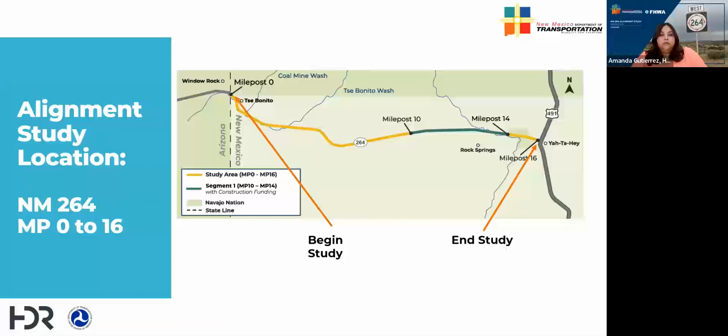The corridor itself has 3 distinctly different segments. Each segment has its unique characteristics, and so they were evaluated separately. On the far west end at milepost 0 to milepost 0.6 through Bonito, an urban alternative was evaluated. Traveling east through the rural section to Yah-Ta-Hey, more rural alternatives with limited access were identified. Finally, on the east side at milepost 15.5 to milepost 16 through Yah-Ta-Hey, it was a combination of urban and rural conditions, and so those conditions were evaluated separately.

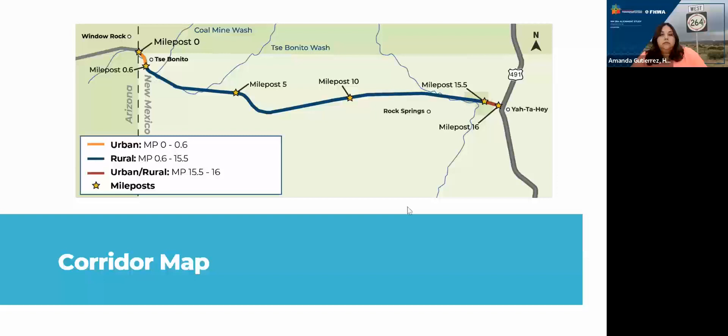As part of the New Mexico 264 alignment study to date, we've documented the existing conditions. That's where we go in and look at specific elements in the corridor that may need improvement or to be addressed. Additionally, we looked at traffic and safety areas of concern. Transportation needs analysis was performed to identify speed characteristics and other elements that we'll cover later in this presentation. It also investigated sensitive cultural and biological resources, and it identified improvement alternatives broken up into those 3 distinct segments I discussed earlier. Amanda mentioned the meeting where we sought public input and agency feedback, and from that point we developed alternatives, evaluated them, and proposed those recommended improvement alternatives.

The purpose and need of the project is really the backbone. It's what needs to be addressed throughout the corridor specific to this project. One of the main elements was to address the existing conditions of the roadway. That includes pavement condition, geometry, and other elements that could impact the safety of the corridor. Additionally, we looked to improve drainage conditions.

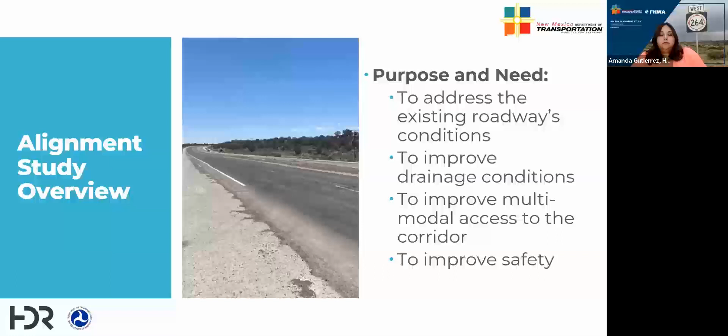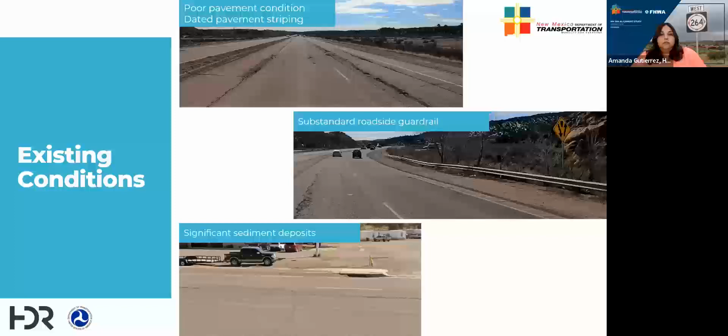As far as existing conditions go, the top picture shows a location with poor pavement and really outdated striping. This is not a unique photo in the corridor—the pavement condition is pretty poor throughout the full 16-mile corridor. In the middle, we see some substandard roadside guardrail. Since this guardrail was installed, the standards have been evaluated, tested, and improved, so there are better systems now for handling roadside obstacles.

And then on the bottom, we picked a segment through Bonito to note the significant sediment deposits. You can see that the sediment buildup makes the sidewalk almost unusable.

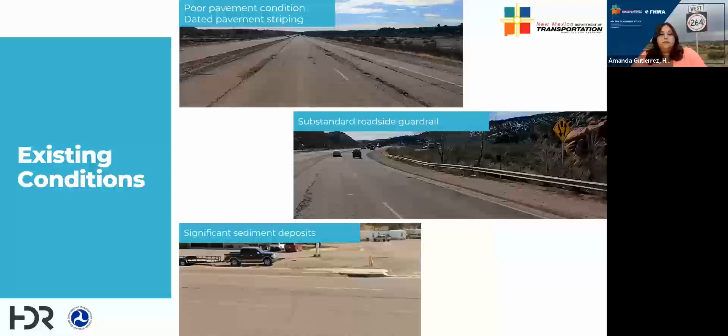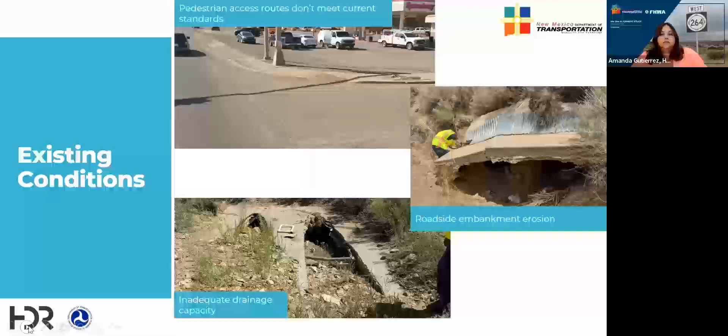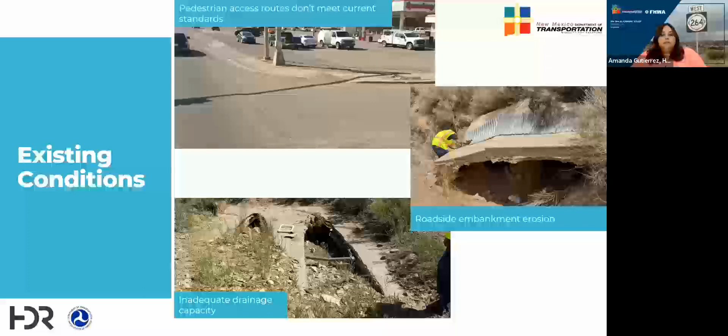Pedestrian access routes don't currently meet ADA standards. In the top picture, you can see the curb ramp at Alma Drive on New Mexico 264. Not only does it have significant sediment at it, but it doesn't meet current standards as far as ramp slopes and grades. And the middle picture really shows the issue of erosion throughout the corridor.

This is not unique to this location—there are several pipe outlets experiencing similar erosion. And the bottom picture shows sediment deposits within a pipe, really limiting its capacity, and in some locations causing water to overtop the road.

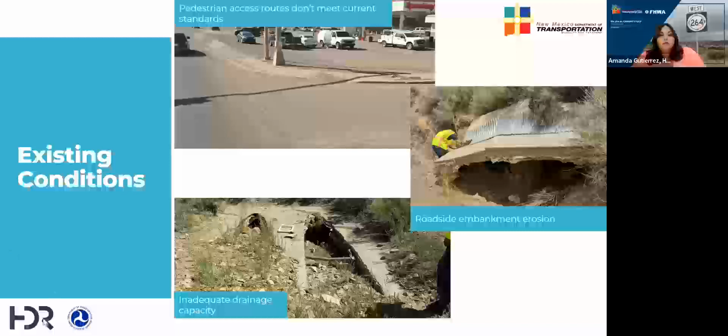For the urban section through Tse Bonito, from milepost 0 to 0.6, the existing typical section consists of a 12-foot two-way left turn lane, two 12-foot driving lanes in each direction, and two 2-foot outside shoulders with 5-foot existing sidewalks on both sides of the road.

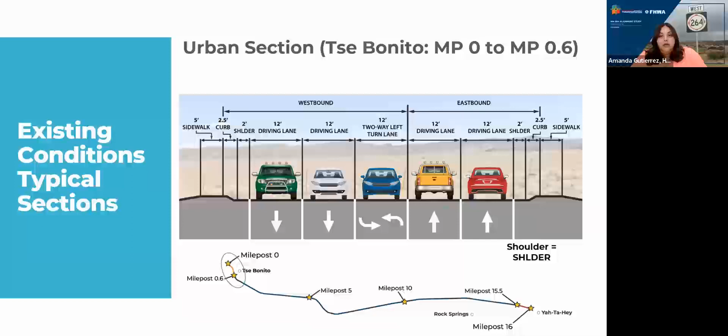For the rural section, this is milepost 0.6 to milepost 15.5. The existing typical section is a 16-foot raised median, two 12-foot driving lanes in each direction, 10-foot outside shoulders, and 4-foot inside shoulders.

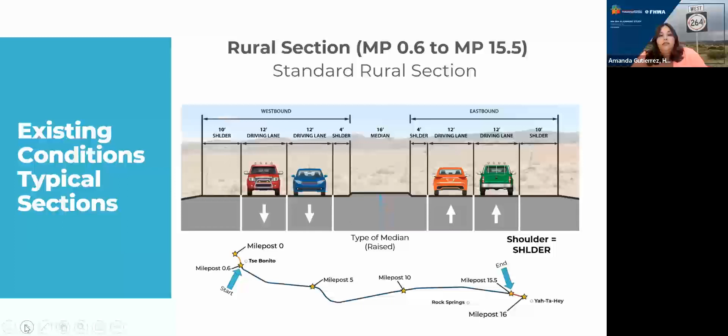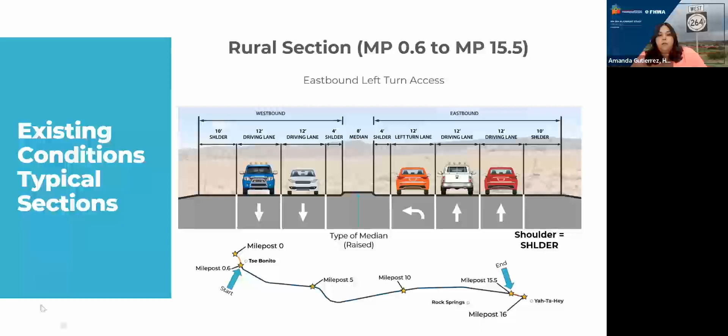In the rural section, for the existing left turn lane areas, there is an 8-foot raised median and a 12-foot dedicated left turn lane. The remainder of the typical stays the same from the previous slide. This slide shows, for eastbound traffic, the 12-foot dedicated left turn lane, and this one shows the westbound 12-foot dedicated left turn lane with the 8-foot median.

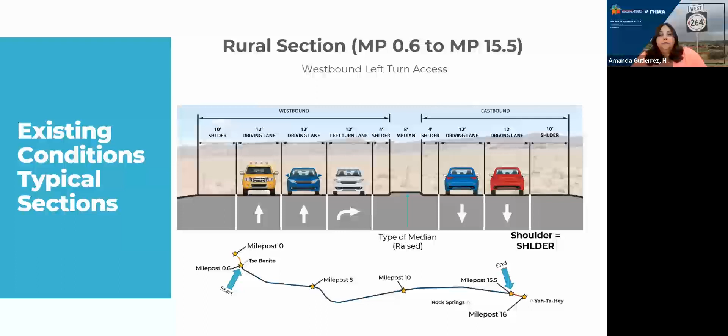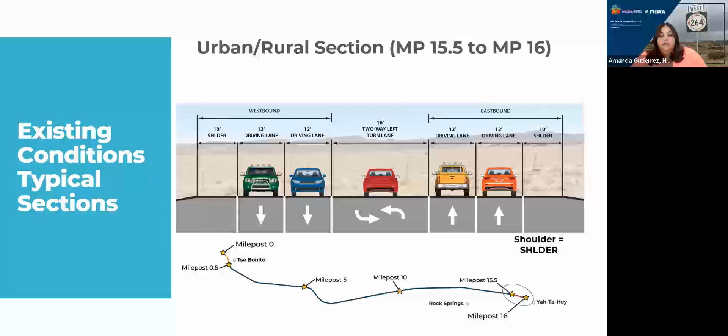Now for the urban-rural section through Yah-Ta-Hey, from milepost 15.5 to milepost 16, the existing typical section is a 16-foot two-way left turn lane. There are two 12-foot driving lanes in each direction and 10-foot outside shoulders.

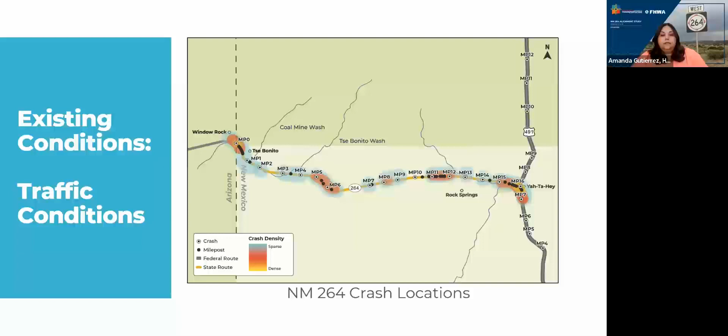So as part of the study process, we developed the initial alternatives. We took into account the existing conditions and the transportation needs analysis and the elements that go into that. And we revised the alternatives based on the project needs.

So as part of the evaluation of the final alternatives, we started by including the no-build alternative. The no-build alternative is the alternative where no improvements in the corridor are done, and it's compared and scored against the proposed alternatives. So for the urban section, we had the no-build alternative plus 6 additional alternatives. For the rural section, we had the no-build plus 3 additional.

In this area, we established the final recommendations, and that's where we are now.

So for the urban segment, the recommended alternative is alternative 3, which consists of a 16-foot two-way left turn lane, 2 12-foot driving lanes in each direction, 6-foot bike lanes, and 6-foot sidewalks on both sides of the road. During the final design, the team can investigate the potential of including a bike lane buffer by reducing the driving lane width.

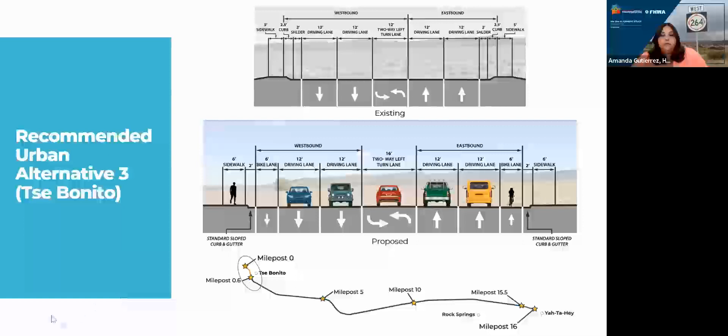At the signalized intersection of New Mexico 264 with Alma Drive, the recommended typical section has a 4-foot stripe median and a 12-foot dedicated left turn lane, 2 12-foot driving lanes in each direction, 6-foot bike lanes, and 6-foot sidewalks on each side.

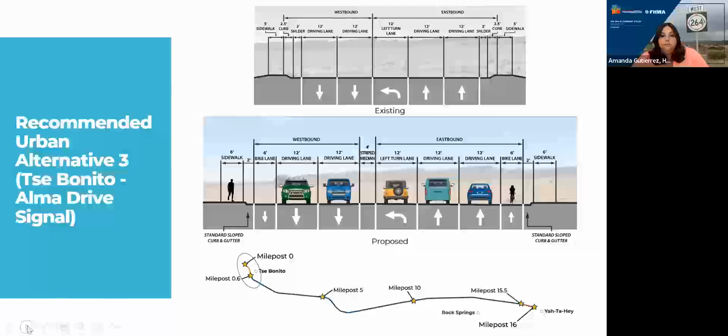The urban section traffic improvement recommendations include dynamic speed feedback signs at the beginning and end of the segment to help address speeding concerns in the corridor. You will see this throughout the rest of the recommendations in each segment. Another recommendation is proposed roadway lighting at the beginning and at the end of the urban section, as well as near the bus stop just west of the Alma Drive intersection.

So recommendations for improvements to the Alma Drive signalized intersection will include dedicated left turn lanes on all legs of the intersection, updated traffic and pedestrian signals, updated curb ramps, and improved striping, including stop bars and crosswalks.

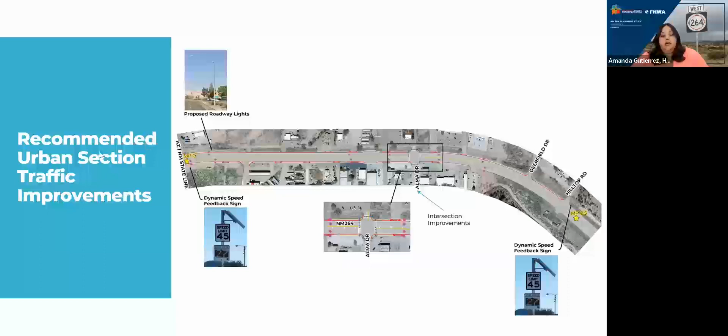The recommended drainage improvements for the urban section include replacement of the turnout crossing culverts, building of sediment traps, and erosion control. As you can see below, there are examples of erosion control with a check dam and a sediment trap. Sediment traps pond the water to allow sediment to settle out before releasing the flow at the inlet or outlet, which will reduce sediment buildup in the pipe and from the roadway.

Other improvements include reconstruction of the roadside ditch on the north side of New Mexico 264, as well as updating the existing storm drain system through Tse Bonito.

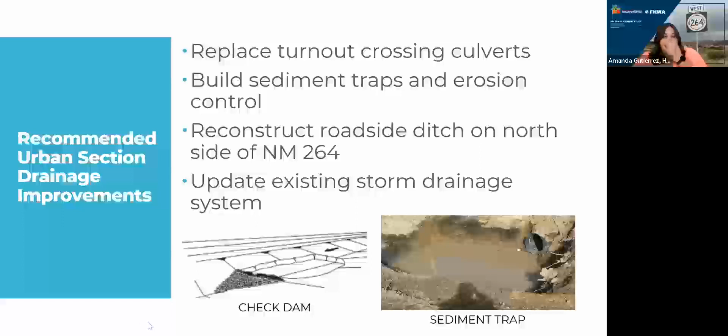So for the rural segment, from milepost 0.6 to milepost 15.5, the recommended alternative is alternative 4, which consists of an 8-foot stripe median, 2 12-foot driving lanes in each direction, 8-foot outside shoulders, and then rumble strips will be included in both the outside shoulder and in the median.

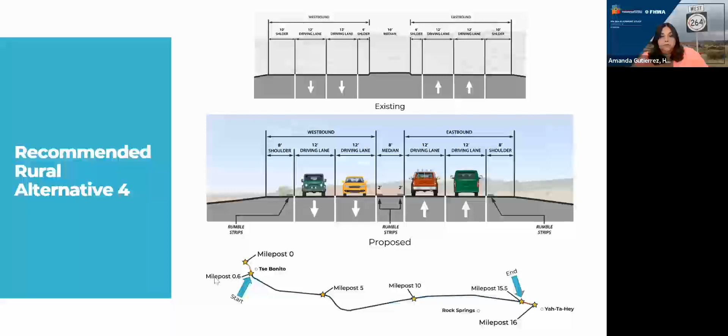So for the areas in this rural area where they have existing left turn lanes, the recommended typical section will have a 4-foot stripe median, a 12-foot dedicated left turn lane, 2 12-foot driving lanes in each direction, and 8-foot outside shoulders. Rumble strips again will be added to the outside shoulder and to the median.

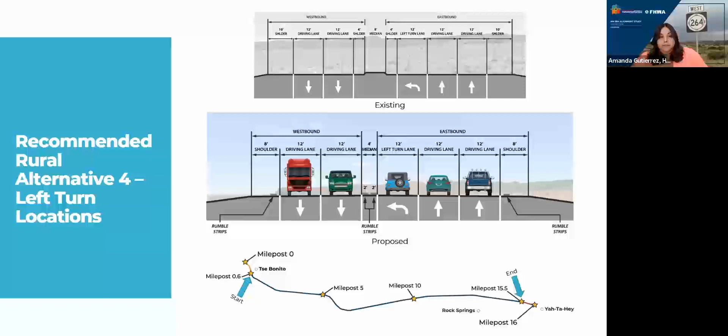So for this section, the recommended traffic improvements will include dynamic speed feedback signs throughout the area, proposed roadway lighting at milepost 5.3, 5.5, 6, 8.2, and 8.9. Installation of roadway curve warning signs for the reverse curves between milepost 5 and milepost 7. Installation of stop signs at all turnouts.

An addition of a right turn lane for eastbound New Mexico 264 at Defiance Draw Road and Windy Mesa Drive. And then an acceleration lane for westbound New Mexico 264 at Wildcat Drive.

For the bridge at milepost 4.2, the recommended improvements are a bridge deck replacement and then minor rehabilitation to the structure itself.

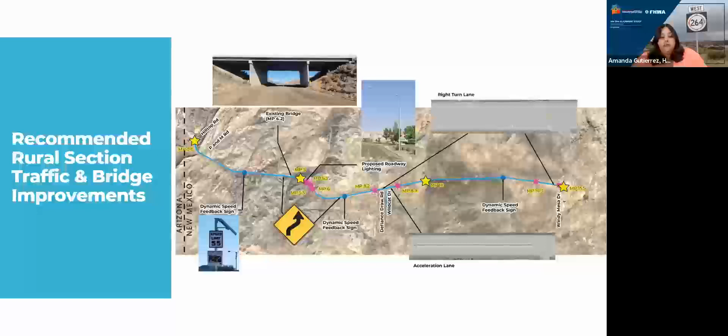The recommended drainage improvements for the rural section will include replacement of existing turnout crossing culverts, building of sediment traps and erosion control, and then reconstruction of drainage culverts.

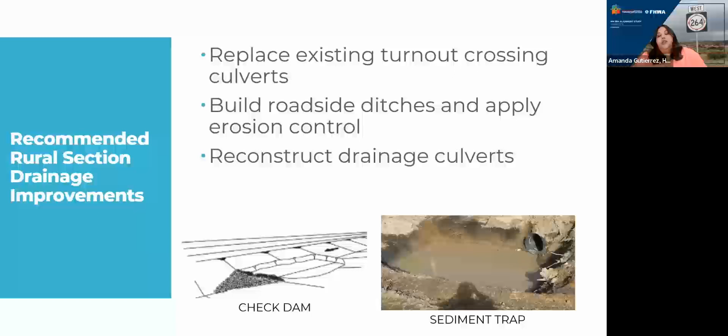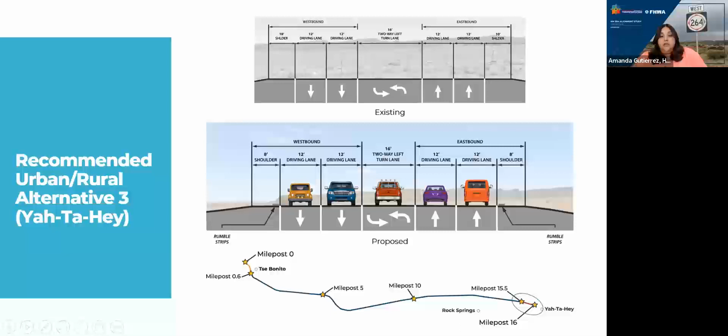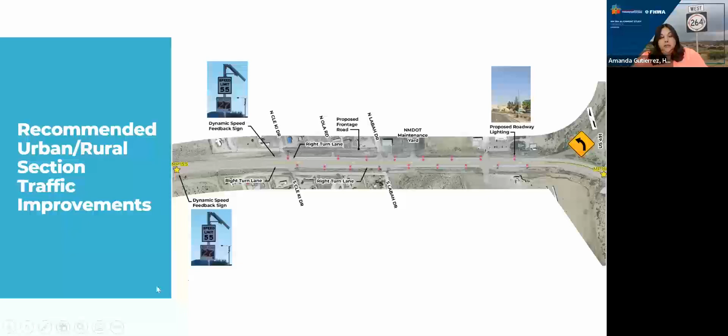The recommended drainage improvements for the urban-rural section include replacement of all the existing turnout crossing culverts, building of a roadside ditch and erosion control, and reconstruction of the drainage culverts.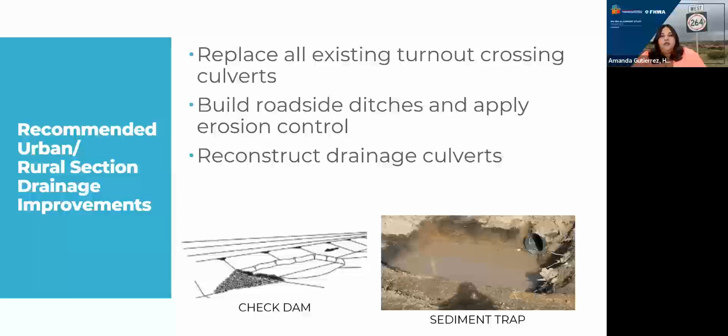In summary, the alignment study corridor recommendations include improved guardrails, improvements to the pavement conditions, improvements to the turnout access, upgrade to the signal at Alma Drive, updated pavement striping and signs, the addition of dynamic speed feedback signs, improvement to the drainage infrastructure, and improved bicycle and pedestrian facilities.

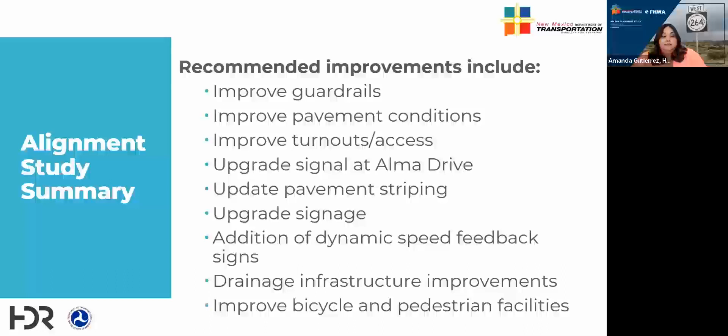Access management is a big driver of safety in any corridor, especially those with more densely packed access locations. The NMDOT has an access management manual that defines the minimum distance between turnouts to improve safety. As such, access consolidation and potential closing of locations are identified as part of the study.

Through Tse Bonito, the main section across the top, you can see turnout numbers highlighted in green. Those are locations that we're recommending be consolidated into a single access. And then those shown in red are accesses that are too densely packed and would be closed and routed to existing turnout locations. It's essentially consolidation as well.

In the lower left corner, Navajo Petroleum and Tse Bonito Mobile Home Park, you can see that both 4 and 5 will be combined into a single access. And the second to the left is driveways 8 and 10. Those have access to existing turnouts directly next door, and that's where those accesses would be provided.

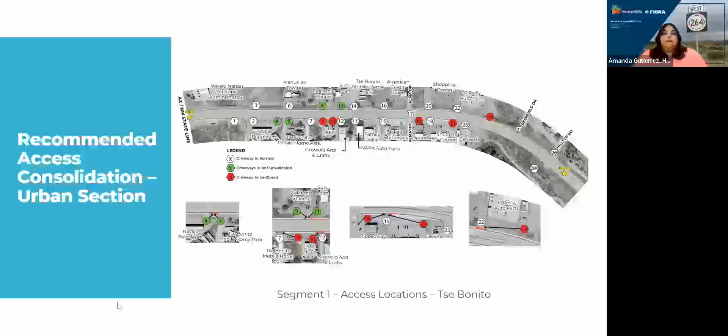On the east end of the project, Amanda already mentioned the closing of the turnout at North Ola Road. You can see here North Ola Road access would be provided through a frontage road, similar to the south of New Mexico 264, and access would be provided either at North Klikai Drive or at North Lava Drive.

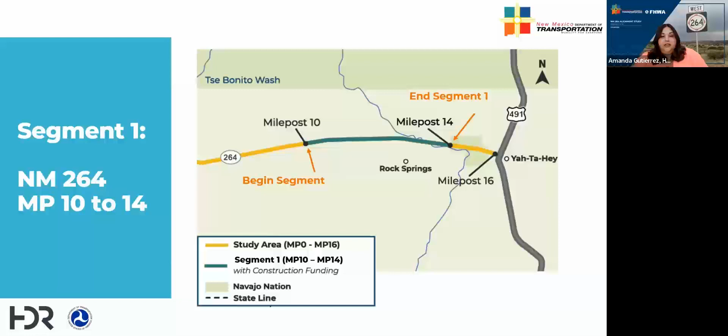For segment 1, this map shows the limits for segment 1 in the blue color, from milepost 10 to 14. This is the final design area that currently has construction funding.

For segment 1, we started the project in the summer of 2022 with the environmental documentation effort and the preliminary design. As we moved into the fall of 2022, we started the final design efforts, which will be completed in the fall of 2023, and then construction starting in the spring of 2024.

Similar to the recommended improvements in the alignment study, segment 1 proposed improvements will include reconstruction of the existing pavement, improvements to the roadway geometry and drainage infrastructure, and updating to the roadside guardrails, signs, and pavement markings.

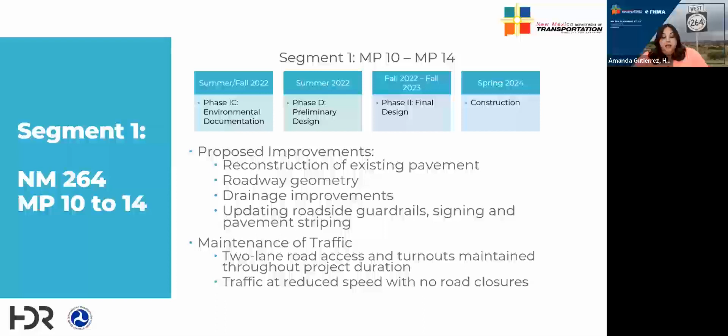During construction, traffic speed will be reduced with 1 lane of traffic in each direction, and the turnouts on the north and south of New Mexico 264 will remain open and will be maintained throughout the project duration.

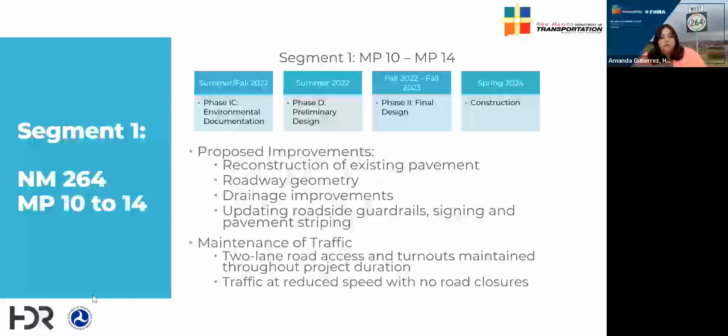The proposed typical section for this segment will consist of an 8-foot striped median, two 12-foot driving lanes in each direction, and 8-foot outside shoulders. Rumble strips will be included on the outside shoulder as well as in the median.

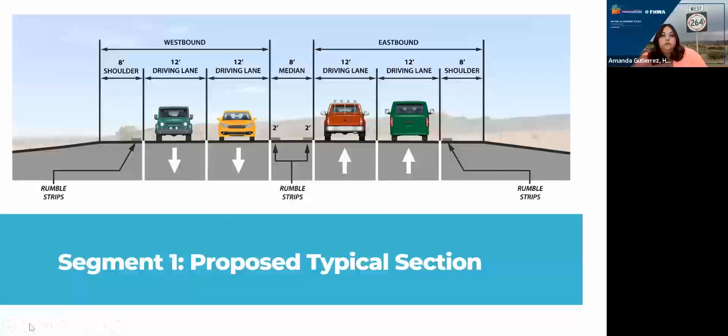For the areas with left turn access, there will be a 4-foot striped median with a 12-foot dedicated left turn lane, two 12-foot driving lanes in each direction, and an 8-foot shoulder on the outside. Rumble strips will again be on the outside shoulder as well as in the median.

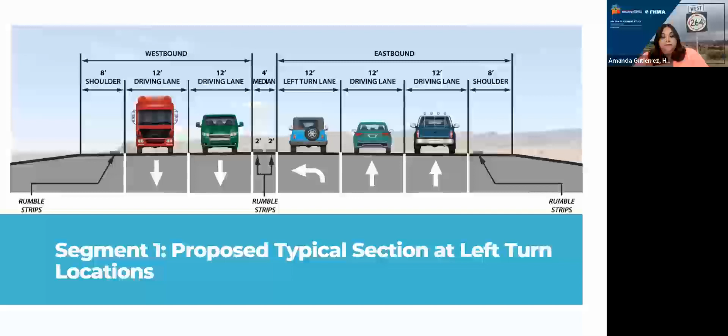Now for the overall project schedule, to provide a summary of the entire corridor. In spring/summer 2022, we established the need for improvements. In fall 2022, we held the first public meeting and identified the improvement alternatives. In fall/winter 2022, we evaluated those alternatives and prepared the draft study. This spring 2023, we're having our second public meeting tonight, identifying the recommended alternatives. This summer, after incorporating input from this meeting, we will complete the 264 alignment study. Then in spring 2024 is the anticipated start of construction for segment 1, from milepost 10 to 14.

For next steps, we mentioned the construction of segment 1 from milepost 10 to 14. For the remainder of the corridor, preliminary and final design will take place. We need to note that there's no funding identified yet for construction beyond segment 1, and based on the length and cost, it's likely that remaining section would be constructed in phases.

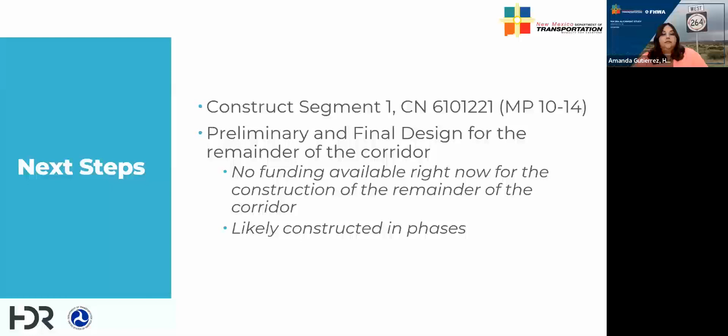With that, we would like to take any questions. I think in a second you're going to see how to ask them.

Hi there, I'm a resident in Tse Bonito. I had a question about it looked like on the map or the slides that the department was going to combine the turnoff into Navajo Petroleum and that trailer park. So my question is, was there consideration for school buses from Gallup, McKinley County? They usually turn at that turnoff where the Tse Bonito Mobile Home Park is, and kind of go around onto that dirt patch in front of the trailer park. Was that taken into consideration for the school buses that pick up and drop off kids there, between the highway and the trailer park? I don't know if that was addressed.

The recommendations provided are primarily due to the density of the turnout locations. I understand the issue of providing a loop for the school bus to go through there. One thing we looked at was whether that loop could be maintained using the existing turnout you see, and then using that same combined access to complete that loop. Essentially, we've got two turnouts that are very closely spaced together, and it's really just combining the two, not moving either one any significant distance.

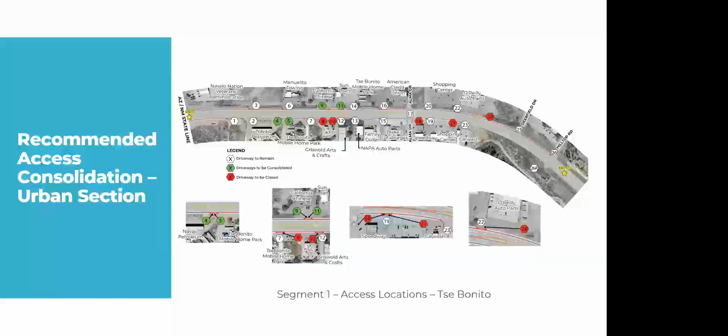Attendee 2, I did see you just put another additional comment to clarify your original live comment. You said, my comment on Tse Bonito was, I am glad to see a few reduced turnouts because today there are just too many that causes last minute turns to the businesses. Thank you for that.

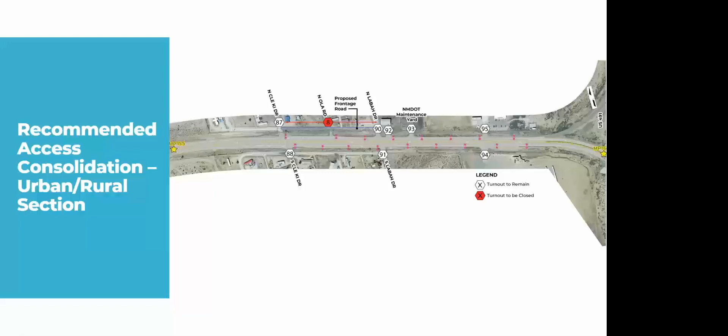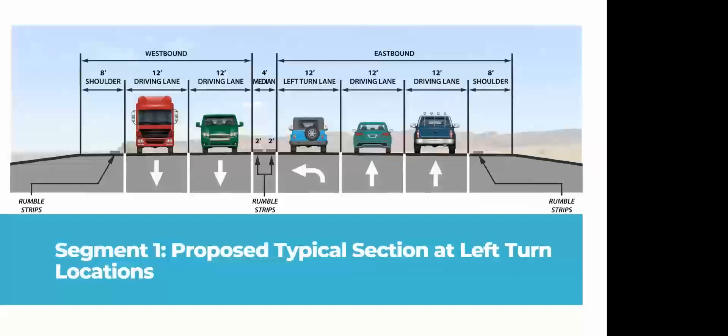Thank you for your comment. Ed and Amanda, do you have anything to add to that? We certainly will note that all of the drainage culverts in the corridor are being addressed, and we recognize that location as well as several others within the corridor that need to be addressed. As Amanda went through the recommended alternatives, replacing those drainage crossings was a significant part of the project, upsizing and really making sure they maintain capacity and keep the sediment off the roadway and out of the pipe.